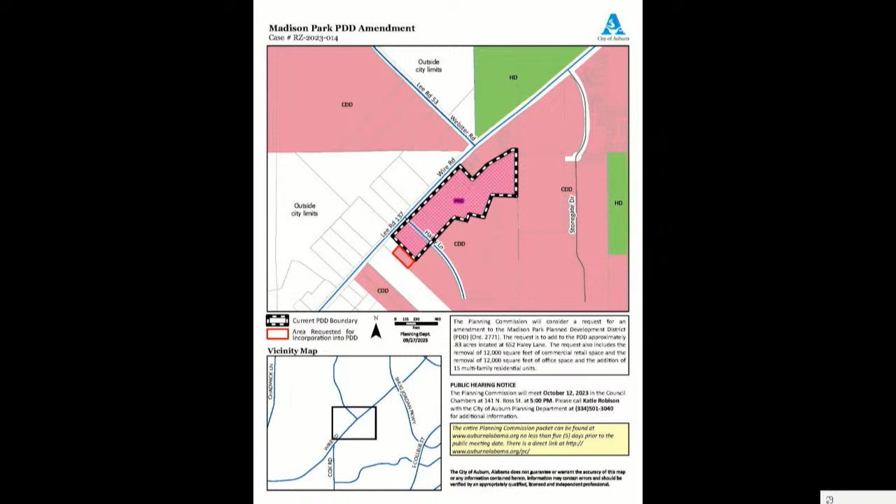The property is located on Wire Road. The PDD itself is about just over 11 acres, and with the addition of this property, it'll be a little over 12. The portion proposed to come into the PDD is currently zoned CDD.

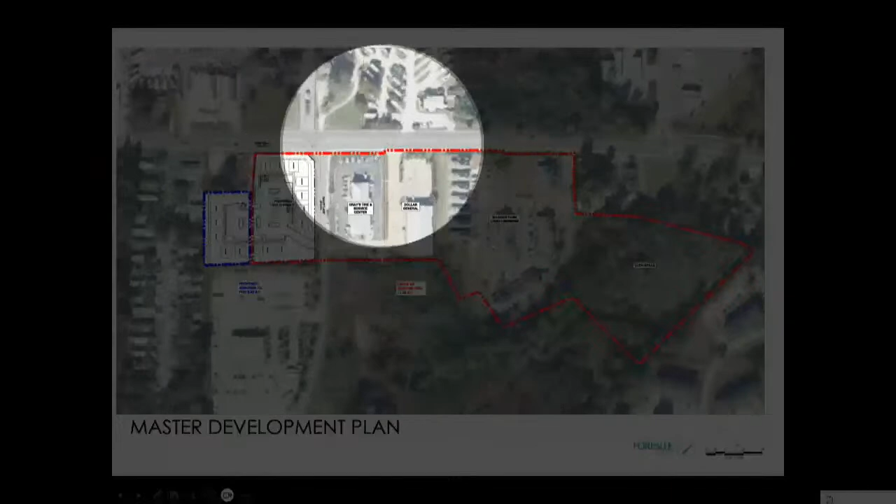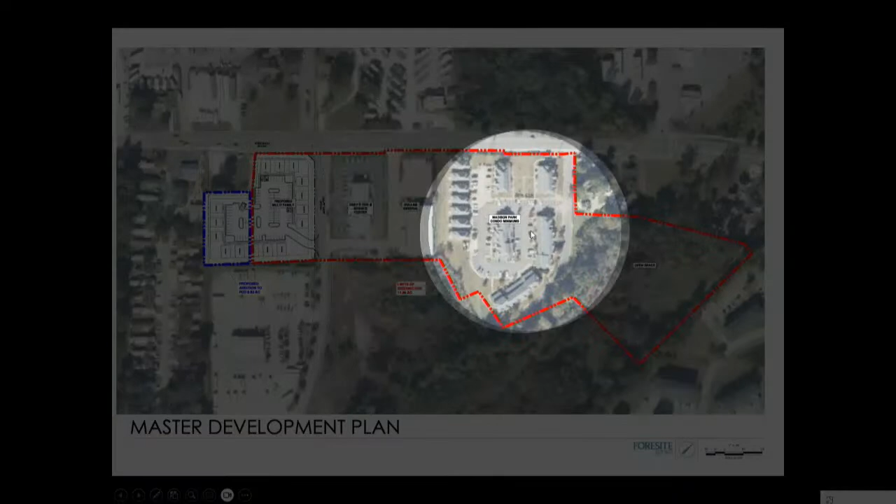This is the approved master development plan. It includes 37 residential properties located on this portion of the development, and in the center are the two commercial uses: Dollar General and Gray's Automotive. The approved plan shows this area here as commercial along Wire and office in the rear of the property.

The future land use for the development is low to medium intensity mixed use for the portion outside of the PDD, and the existing PDD is obviously a PDD. The mixed use component is designated for mixed use commercial with residential, and on a major corridor like Wire Road, the point is to have commercial uses on the street. As the city continues to grow out this way and further past, it's very important to leave commercial uses on the street.

Due to that, staff does recommend denial, since there are inconsistencies with the future land use plan. I'll be happy to answer any questions you have, and the applicant is here this evening.

If there's no questions at this time for Katie, we will ask the petitioner if he'd like to come and discuss his proposal with us.

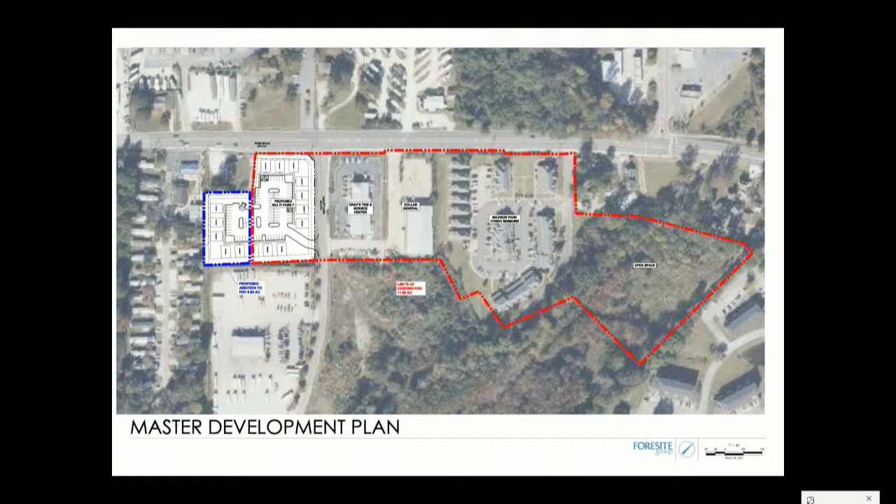All right, any more discussion? Anybody have any more questions? Is anyone prepared to make a motion? Can die for a lack of a motion. That'd be first for us, but we can do that.

I'm going to move to approve RZ 2023-014 - for denial? No, okay, moving to approve it, to forward to city council with a recommendation for approval. Second. Motion made and seconded.

Need an explanation of the motion. All in favor of the motion, say aye. Aye. Any opposed, say no. No. Let's have a roll call, please.

Robin Bridges, yes. Dana Camp, yes. Bill Chancellor, no. David Wisdom, yes. Warren McCord, no. Nanette Reese, yes. Bob Reichenbaugh, no. Joseph Astrup, no. What's the count? A tie, four-four. And it fails.

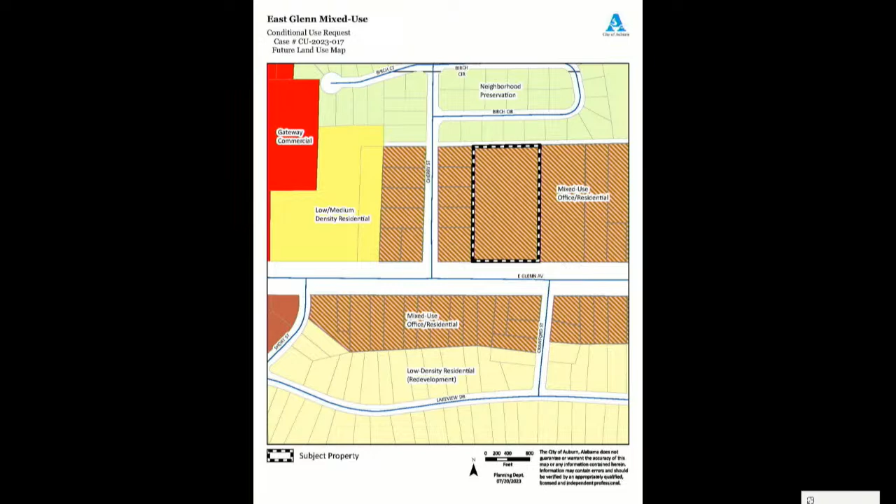The future land use designation for this property is mixed-use office and residential. The CRD-E zoning district promotes the redevelopment and mixed-use character of a neighborhood and provides for intermediate residential densities and necessary commercial uses. Its target is areas for renewal and redevelopment that will stabilize the nearby corridors to this property.

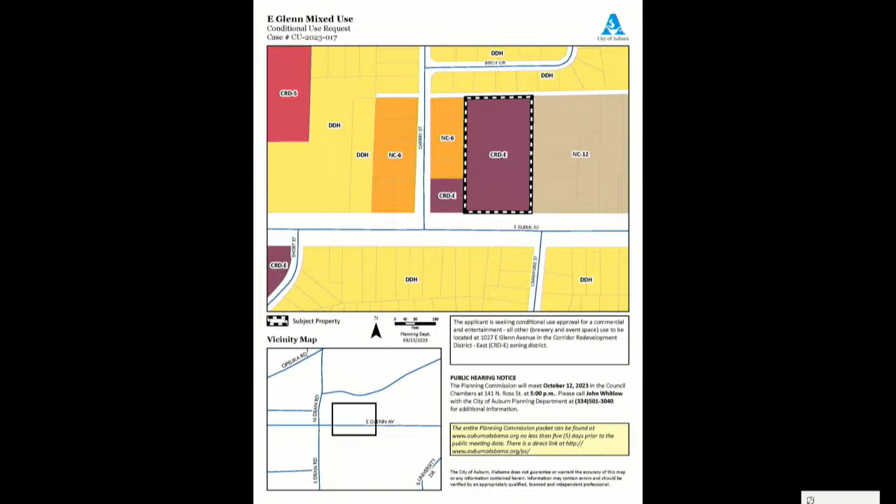The development as a whole received conditional use approval in May of 2023 for a mixed-use development with residential and office uses. As you can see by this site plan, the applicant is proposing a 2-story brewery and event space consisting of 8,500 square feet that will front East Glenn Avenue.

The brewery will be located on the first floor and will operate at a local scale manufacturing level. The event space will be private and on the second floor, and will be closed off at the dates and times that a private event is not being held.

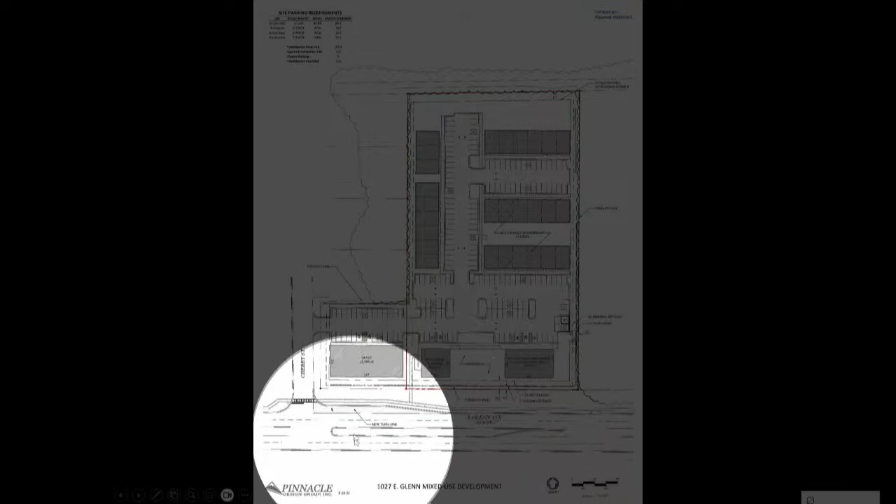The subject property will have a single access point off of Cherry Street. The subject property at the corner of Cherry Street and East Glenn is owned through common ownership, so they would be taking access and driving through to connect to the subject property.

There's an outdoor seating and dining space that will have occasional live music present, located between the brewery event space and the proposed restaurant on the far east corner of the property.

Based on the provided site plan, adequate parking is present for the proposed uses. The minimum parking requirement may be reduced further than the provided site plan currently shows; however, the amount of parking provided at the site will remain the same. Planning staff will again review the parking requirements upon DRT submittal.

Staff recommendation is approval with conditions, and there are a few conditions I'd like to note. First, outdoor music will be limited to no amplified music after 9 p.m. to ensure there's no nuisance or negative impacts affecting the surrounding residential areas.

Second, a traffic impact study is required for this development and this submittal. It has currently been submitted and is being reviewed by engineering. Last, a stub out will be provided at the far east point of the property. The applicant is present for any questions you may have, and also has put together some renderings that were not able to be included in the packet materials.

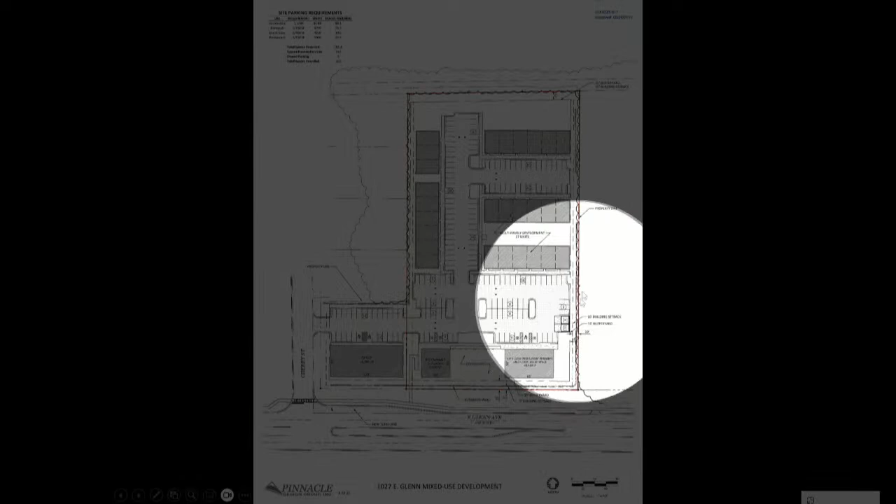Where's that stub out? The stub out's going to be on the far east. It is not illustrated in this current site plan in front of you, but you're proposing that as a condition. Yes, it's a requirement. Before, this came before us and passed without that extra piece of property.

And what was the access at that time? Was it a right in, right out? That's correct. Where was that? Was that where the courtyard is? It went right through the courtyard space, yes. It just drove right out there and was a right in, right out to East Glenn.

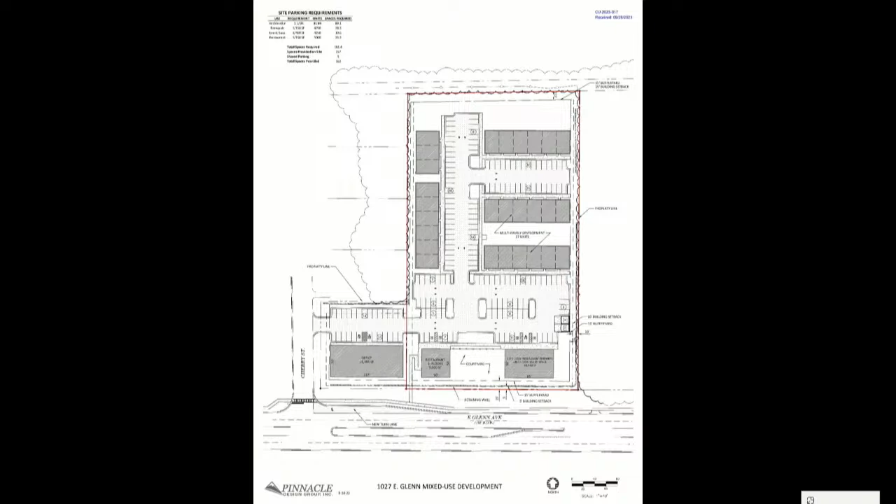And the accel, decel lanes are proposed already without the DRT? That's correct. They are proposed and were included in the traffic impact study materials, so those are being reviewed as well.

I have a question. In our packet it said that it required 162 spaces, but they only had 157, so they were going to have to acquire 5 additional parking spaces. So they're not meeting the parking requirement, correct? On the site alone, that is correct, but per the zoning ordinance, an adjacent property can share up to 20% of their parking spaces with an adjoining property.

So in this case, of the 27 spaces that would be provided at the office use that adjoins at the corner of Cherry and Glenn, they would get the corner lot. Okay, they could get a corner lot, a maximum of 6. But they're going to have to have some more if they have this stub out, because it takes 3 parking places. Agreed. Okay.

You'll see in our staff report that we will again review the final parking requirements during the DRT process. I think some of the square footage is not necessarily associated with this conditional use, but with some of the other items on the site, such as the restaurant. The applicant will share more information later, but what they're proposing now is reducing their overall parking, so based on that, they would be able to meet it all on this single parcel without any sharing of the office area. But again, that's something we will review and confirm during the DRT process in permitting.

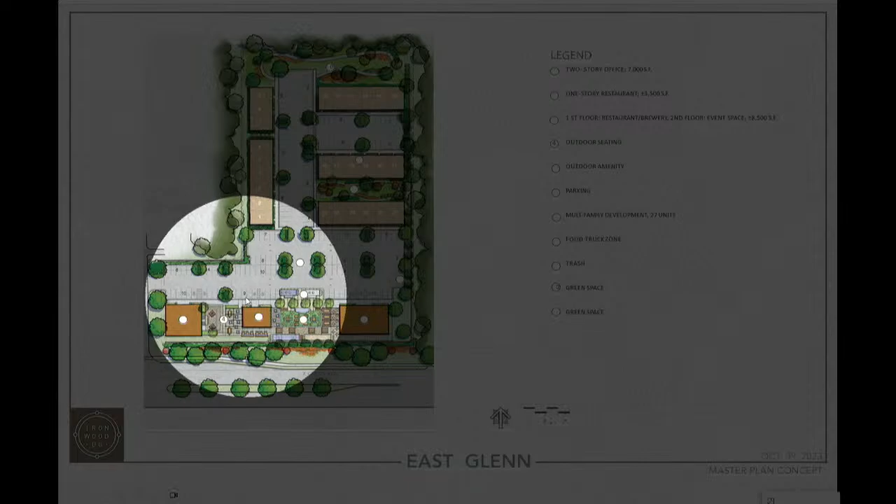Okay, so y'all can see where I point. This is the office building, and we actually have a property line here, and we submitted a consolidation plat today to consolidate all this now that it's all one owner. I'm not sure, Kevin, what that does as far as shared parking—is a shared parking arrangement still required? Well, with the reduced footprint of the restaurant area, you would still be able to meet all that parking there, so that sharing requirement wouldn't necessarily be there based on these square footages.

Okay, so after a lot of meetings and discussion, I feel like we've worked out all the details that we can until we get into design drawings and DRT and get with Allison and things like that. We're not showing the stub out on this drawing, but we don't have an issue with that, and it would not occupy where spaces are—it would be aligned with this drive aisle, essentially an extension of it, so it wouldn't affect the parking spaces.

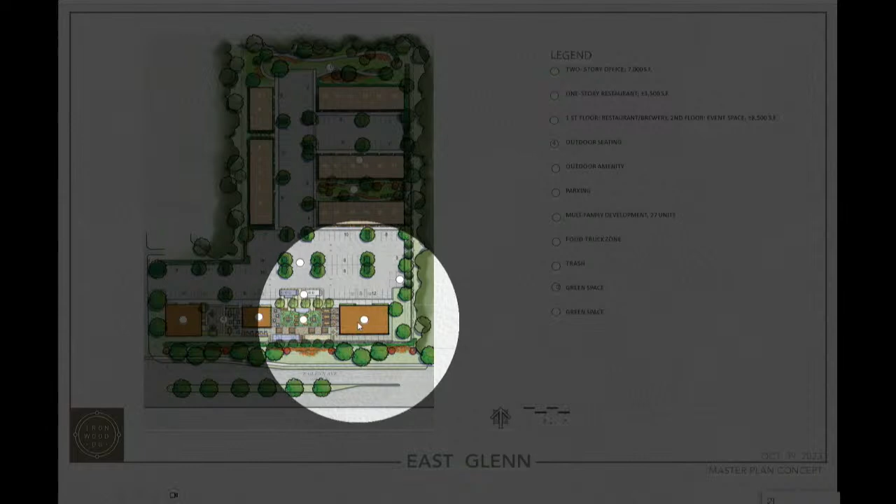This would be a pizza restaurant, with a lot of glass on front incorporated with outdoor spaces. We have a couple of food truck spots here. This building is the subject of the request tonight—the brewery and restaurant on the first floor, and event space on the second floor that would probably be mostly open for birthday parties and wedding receptions, something you could rent out. There's really no change on the townhomes in the back, and you see some green space scattered throughout. I'll be glad to answer any engineering-related questions, but we have folks here tonight who can answer architecture or operation questions much better than I can, and I think there's more information they wanted to share.

Pretty much got it. The whole focal point is this is something kind of unique to Auburn—there's not really a space that has an outdoor venue like this. The way the topo of the project works, it slopes from back to front, so it's going to generate a retaining wall, a kind of terrace level that this will sit up high on. It'll be a really neat environment.

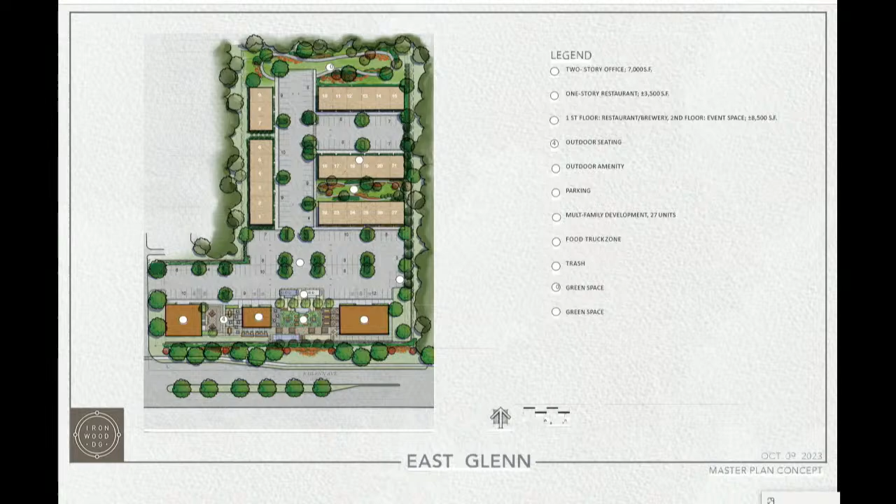We'll have bocce courts, shuffleboard courts, a lot of outdoor seating. We want to do artificial turf for the green spaces. I don't know if anybody's been to the Coastal restaurant down at Orange Beach, but it's kind of a similar feel—fire pits, pergolas, David went over all of that. From an architectural standpoint, the idea is we're trying to bring something unique to Auburn. There's not really a warehouse district in Auburn, so the thought process is doing something a little different. A lot of adjacent towns have a warehouse district, so we came up with a concept of warehouse buildings built late 1800s, early 1900s that have been freshly renovated into a modern industrial feel. I think it'll be pretty cool.

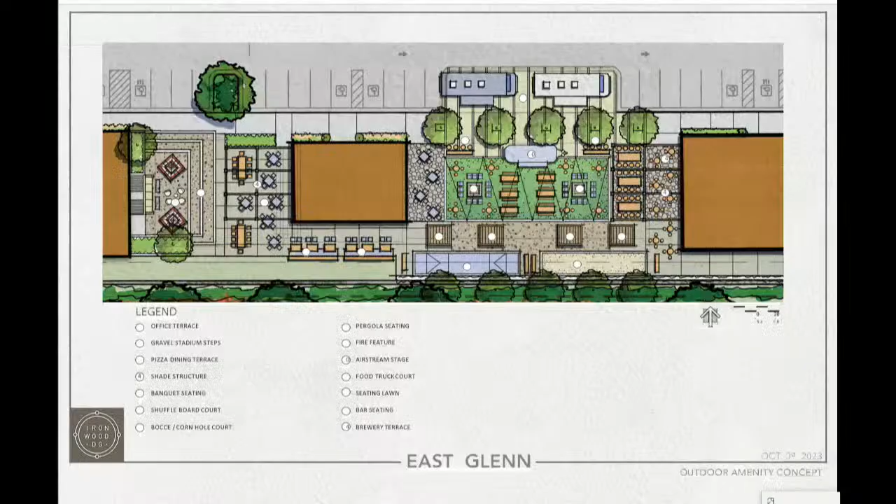Now make sure I'm clear here, Kevin. Basically, what's before us is the conditional use. Correct, which is just the brewery and event space. The restaurant is by right, and the multifamily has already been previously approved under a separate conditional use. Basically, what's before us is whether or not this is an appropriate, compatible site for a brewery as described.

Okay, now I'll open up the public hearing. If there's anyone here who wishes to address that, come forward. I see no one, so we'll close the public hearing and continue any discussion or comments from the commission.

Anyone? I have a couple comments. Say again? I have a couple of comments. All right, do so, please.

Is my understanding, and the developer may want to answer this or explain a little bit more, that the restaurant and the brewery, I know we're not talking about the restaurant, but they will both share the outside patio? That's correct. It's kind of trying to create a little entertainment district, and we'll fence in the area around the restaurant and the brewery.

The restaurant, I have it in my packet. I don't know if it's in the packet, but we can say it's a Carvella's Pizza Restaurant. I don't know if y'all have ever been there. They have 5 locations in Georgia, and they're trying to move into Alabama, so they will be there. And then Wild Leap, they have 3 locations, but the idea is that they'll share that space. We want to do the roll-up doors, the glass roll-up garage doors, so that on warm days they can open the doors and let people migrate around out there.

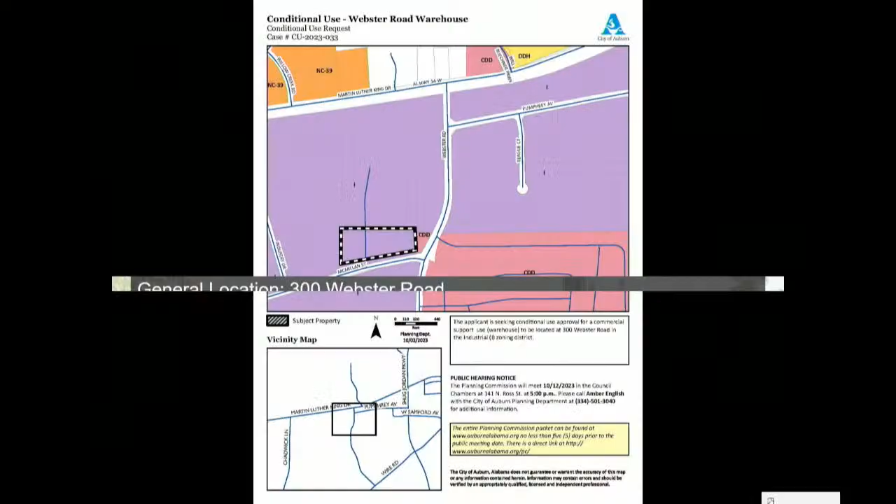We're ready now for the Webster Road Warehouse. Yes, sir. This is a request for conditional use approval for a commercial support use, specifically a warehouse distribution facility, located at 300 Webster Road in the industrial zoning district.

The immediate property in the area south of Highway 14 is zoned industrial. There is an existing mobile home park to the east that is zoned CDD, and there is a sliver of CDD also on the subject property.

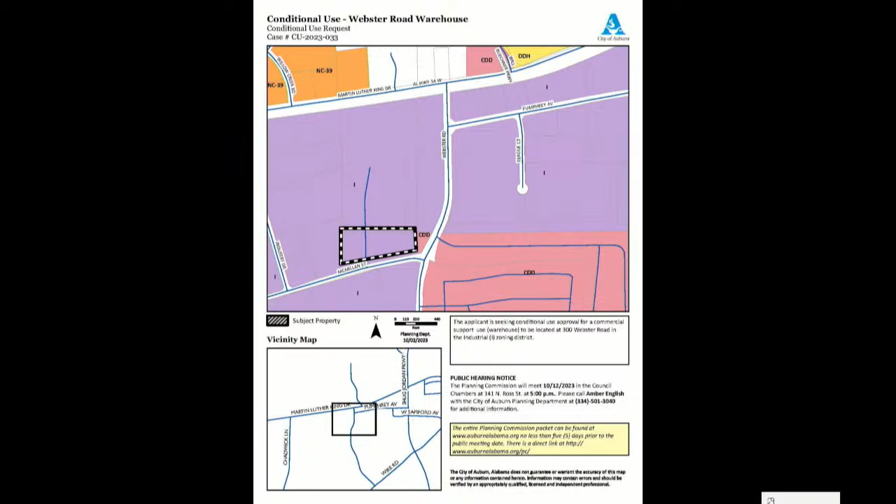The initial development will be a 100,000 square foot distribution facility with 12 loading docks. The request also includes an area for expansion, 50,000 square feet, with an area for 8 additional loading docks. The current curb cut on McMillan will be closed and 2 new curb cuts will be created.

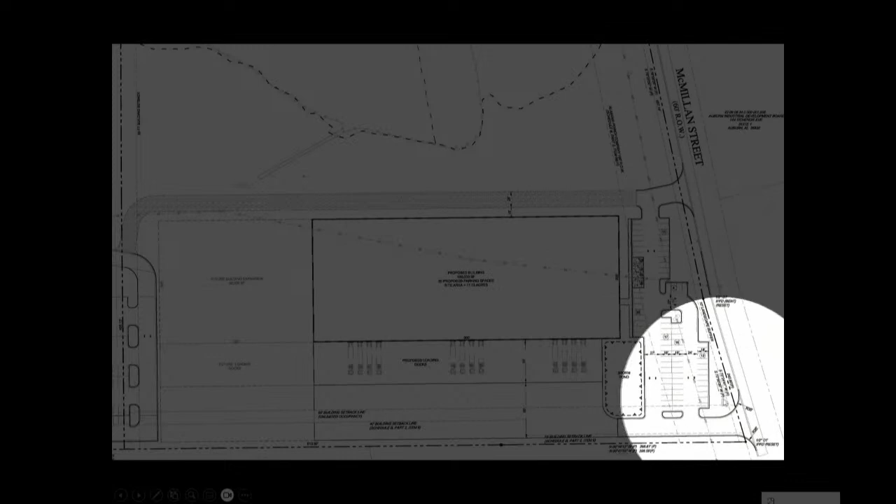The use is consistent with the industrial zoning district and the future land use designation of industrial, and staff recommends approval.

This is a private distribution center, right? It's not part of the industrial board's property, okay?

Is the applicant here wish to make any comment about the project? I'm Shane Yarbrough. I'm here standing in for Brett Bassman. I'd be happy to answer any questions you guys may have. Okay, if you have any questions.

If not, then we will open the public hearing and see if there's anyone here who wishes to comment about this project. Yes, sir.

My name's Randy Jensen. Nobody lives in the industry park there, but I work right across the street from that at 400 Webster Road. I can't tell from this site plan, but I do have some questions, and one of my biggest concerns is what will happen to the amount of large truck traffic that's coming in and out of McMillan. There's already a lot of that.

But I have questions about the pond. What will this do to the pond that's on that piece of property? We'll get that answer for you.

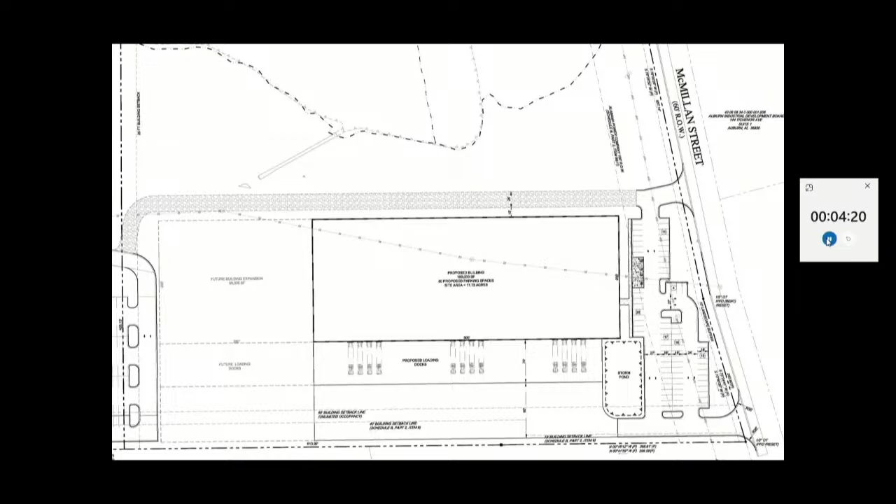So my one concern is what's gonna happen with the traffic, and there's a lot of utilities, high-powered lines coming across there. I don't know what this construction will do to our power there. We've had a history of power disruptions in that park in the past, which were remedied pretty well, but I'm wondering if this will disrupt that again.

Okay, we'll get those questions answered, and just as soon as the public hearing's closed, you sign in when you leave. Anyone else?

Okay, there's no one else, so I'll close the public hearing and raise the two questions that I saw. One was what's gonna happen to the pond that's on that site?

Representative, did they leave? No, he's back here. There he is, couldn't see him. Sorry, I guess it's my turn, right? Yeah, it is your turn. I'm not quite the stature Brett is, but hopefully you guys will be okay with it for the night. And your name? I'm sorry, Shane Yarborough with the Foresite Group.

So according to Brett, there will be no change in the pond whatsoever. The pond shall remain as it is.

As it relates to traffic, this is a warehouse, and I believe the existing facility is being used as a fulfillment center, if that's the proper word. The reason this design is more of a warehouse function: it's 3 stories tall, storing the merchandise for extended periods of time. So it's not a quick turnover like a fulfillment facility. I'm sure from a traffic perspective, these items will be looked at and taken into consideration. There is a distinction between a fulfillment type area, which has really quick turnover and a lot of traffic, versus a warehouse facility, which is more of a storage type facility.

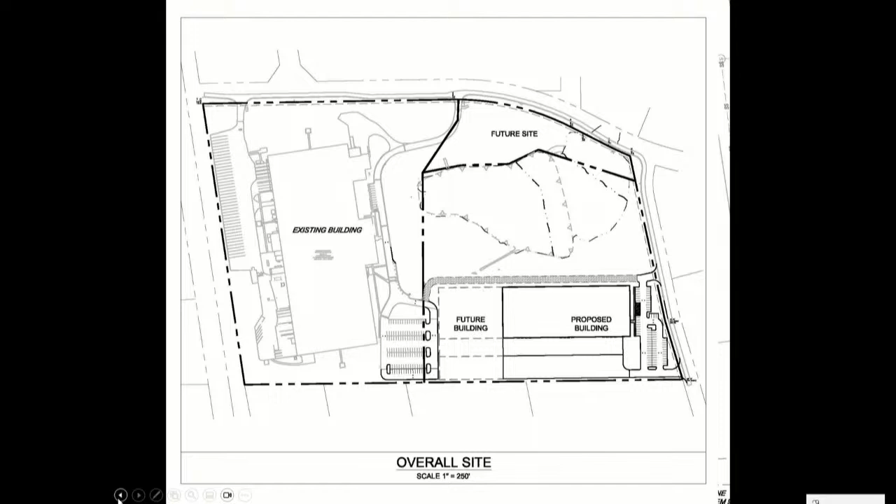Is there any other questions or comments? I'll move to approve CU-2023-033, Webster Road Warehouse. Second. Motion has been made and seconded. All in favor say aye. Aye. Any opposed say no. The motion carries unanimously.

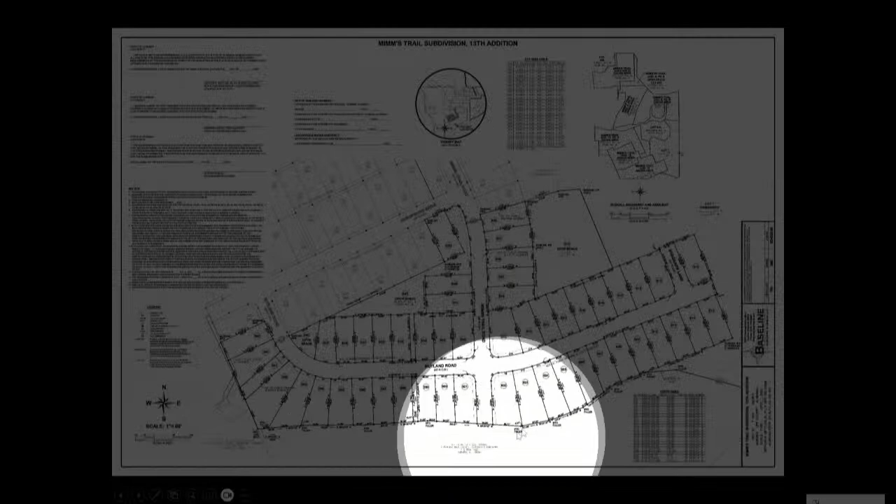The next item is Mims Trail Subdivision, 13th Addition. This is a request for preliminary plat approval for a 56-lot performance residential development, located within the Mims Trail PDD, the southernmost portion, just south of the current terminus of Mims Trail. The development site is just over 17 acres, including 50 single-family detached lots, 3 open space lots, and 2 outlots—one to access the lift station and another smaller outlot for a storm pipe discharge. There is also an area here for future development. The plat meets the requirements of the subdivision regulations, and staff recommends approval.

Can you go back—there we go. I'm trying to understand access to this property. There's a phase here, 11B, or maybe they've changed it to phase 12, that Mims Trail will come through. So there'll be a single access then? Right there, and also Rutland here will come down. Will that actually come through the property? It will, yes. It's Rutland Road. All right, thanks.

I don't see a representative of the developer here—oh, you are a representative, do you have anything more to add? I have no comments unless you guys have questions. I'll open the public hearing, but I don't think there's anyone here for public comment.

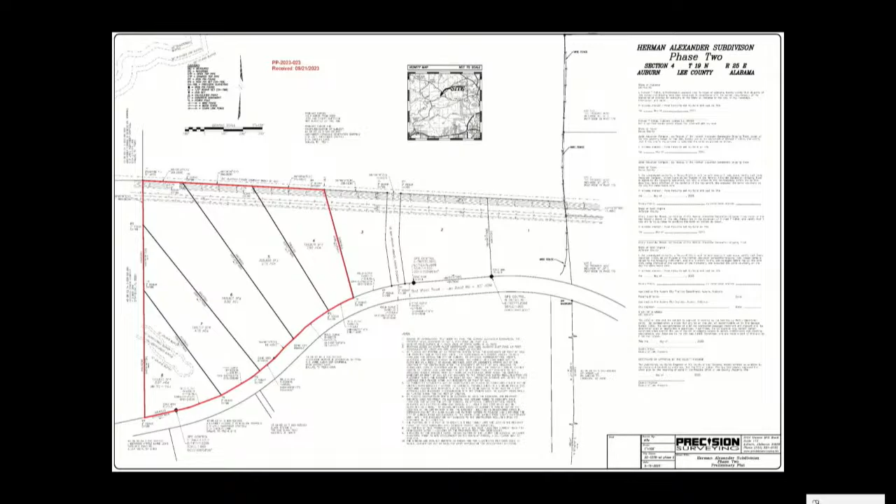Any representative of the petitioner here? If not, this requires a public hearing, so let the record show we've opened the public hearing. There is no response, so we will close the public hearing. Is there any further discussion, or do you want that water source question answered? My approval is not contingent on it, but I am curious. I believe it is Loachapoka—I don't know who else it would be.

I move to approve 2023-023. Second. Motion has been made and seconded for approval. All in favor say aye. Aye. Any opposed, say no. The motion carries.

This next item is the final plat for this same subdivision. Unless you have anything to add to what you've already said—it does not require a public hearing, it's a simple subdivision, so I have no problem considering the final plat the same evening. Move to approve case FP 2023-020, Herman Alexander Phase 2. Second. Motion's been made and seconded. All in favor say aye. Aye. Any opposed, say no. The motion carries.

And I do believe that is the end of the list. Chairman has no communication. How about staff? No communication. Any announcements? The new planning director will be on board and meeting soon.

I'll be back around, I won't be a stranger. Yeah, you're not going too far. He will be on board as of Monday. We look forward to Justice joining us next week. If there's no other business, we will now adjourn. Glad you voted—50 minutes, that's not too bad. Well, I think it's good. Is she going to be all right?